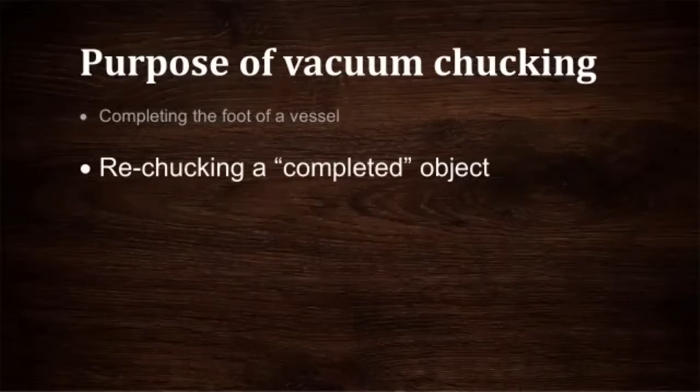The second thing is the possibility of rechucking again. There are some projects I've done where I thought I had it all completed and everything looked really good on the bottom, and I wanted to put it back on the lathe for some reason. So it gives me a way of putting things back on without marring up the surface or doing anything else.

I do sand with my vacuum chuck. Slap a bowl on, sand the outside, flip it around, slap it on the vacuum chuck again, and sand the inside. So it is a sanding fixture, as long as you protected your components, which I'll talk about.

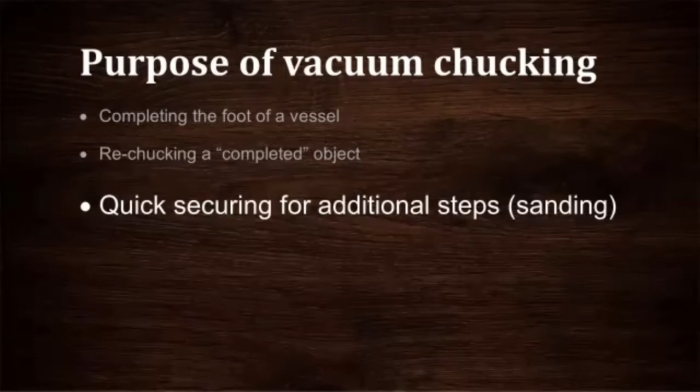There are several components, and basically the way I see it, you just have to have some way to lower the atmospheric pressure inside the vessel - in other words, so the outside atmosphere pushes on it like we want it to.

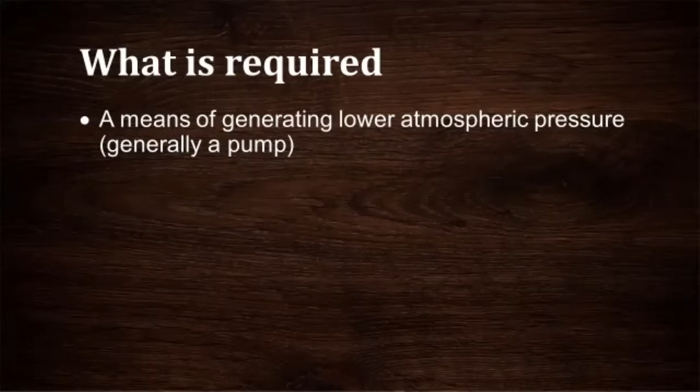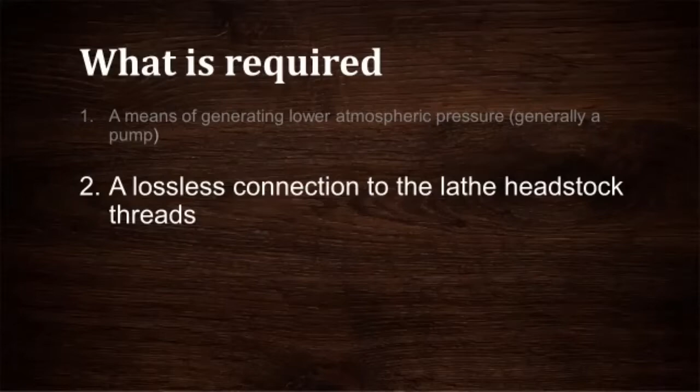I've got to find some way to connect the system through the headstock, so as the lathe rotates, I can continue to suck and have no loss through the connection and continue to suck.

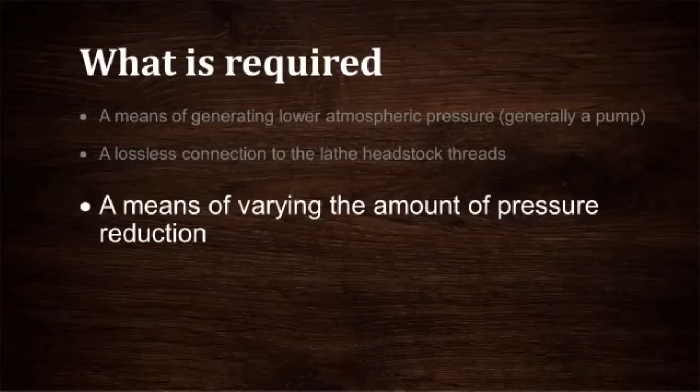I need to find some way to vary it. I could crack it. In fact, one of the things that happens when you're first beginning to work with vacuum chucking and cranking it up too much, you begin to hear things move that you don't want to have move.

And then, of course, you have to have a chuck. There are commercial ones, and then there's handmade ones, and I'll show you how I make them.

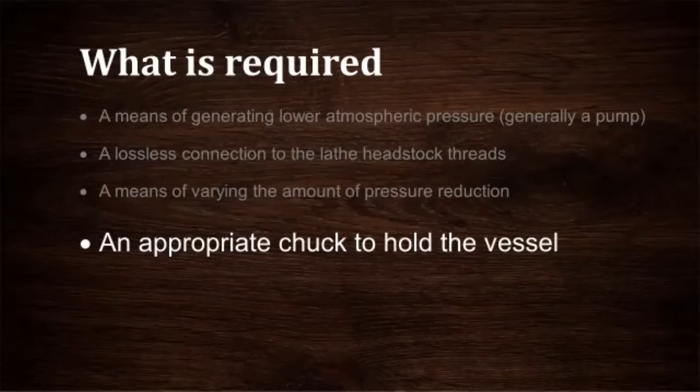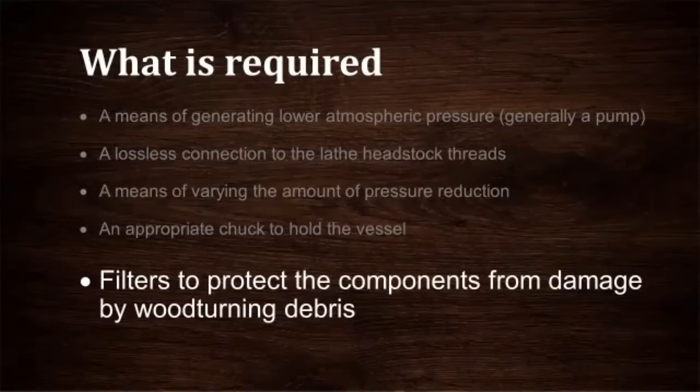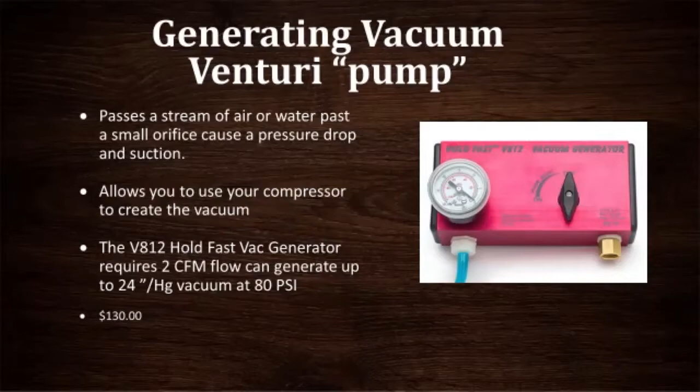One way to generate vacuum - this is one of the early ones that came out, still in the market, from a company called Holdfast. It's not inexpensive, and it requires you to use your compressor. You use the compressor to blow air through a venturi orifice, and that creates a vacuum. This pulls a pretty good vacuum, but it does require a compressor, which runs constantly, and most of ours are not that quiet on top of that, but it's one of the options.

Most commonly used are this kind - this is what we have on the Robust lathe, and it's the same pump we used on the Oneway lathe when we still had it at the club. These are called rotary vane pumps. They're not necessarily very quiet, but they provide high CFM, high cubic feet per minute - in other words, a lot of volume. They also pull a pretty decent amount of vacuum. You turn it off, the vacuum's gone instantly.

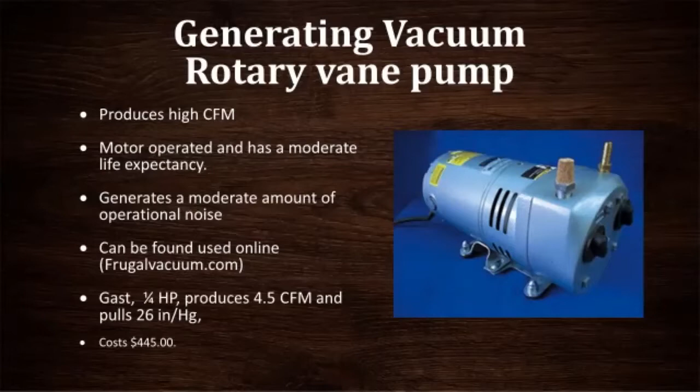These are pretty expensive, but there are places you could buy rebuilt ones. There used to be an electronics surplus store down in South San Jose, and I could always find vacuum pumps down there. These were used in the semiconductor industry, either for test installations or projects. For the bigger depositions in the semiconductor industry, they would not use something like this, but everybody had them for the small test sites, so there were always pumps available. Sorry to say, the source is not there anymore.

We're using one of these at school - this is a diaphragm pump. It's inexpensive and lasts for almost forever. It's totally indestructible, it seems. You fill it with oil, and it uses regular compressor oil. There's a little gauge on the end so you can see if it's got oil in it. They're very quiet, inexpensive, and available at Harbor Freight.

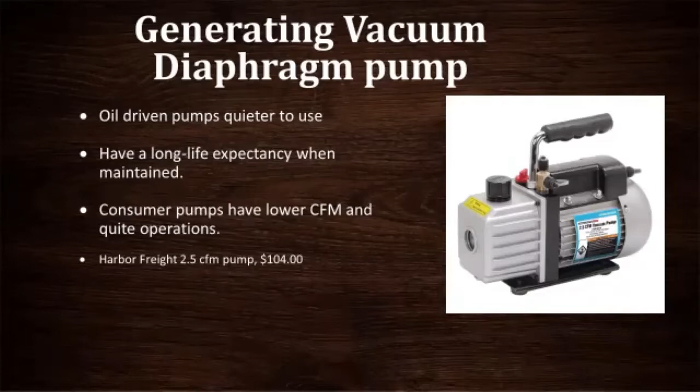This is the one I have at school - it's a 2.5 cubic feet per minute pump. They have a larger one, a 3, and I think it's only like $50 more. Works fine. It doesn't have quite the volume of vacuum that the other ones do, but it works really fine, and it's super quiet and obviously inexpensive. There are other ways.

Rick Nelson did a Sawdust session for us a few months ago, in which he talked about vacuum chucking, and he was using his shop vac. He hooked up the suction, instead of sucking dust into the vac, to the headstock of his lathe. For fairly large projects, it provided enough suction to let him finish his bowls. So it worked out really, really well.

Of course, they are fairly noisy. You could take that compressor we talked about earlier, and instead of having it blow into a tank building pressure, use it backwards to literally suck the air out of your vacuum chuck system. We also talked about refrigeration compressors. They work really, really well, super quiet, and provide excellent vacuum, but the flow rate, the CFM, isn't very high. So if I put a big bowl in there, it may take a few seconds to build up sufficient negative pressure to hold that piece in place.

We used them for a long time. Hal Bain, I mentioned his name earlier, was a club member at one time, and his professional business was refrigeration, specifically ice machines, repair service. He ran a company that repaired commercial ice machines. Ice machines are refrigerators, and they all had pumps. Some of them were pretty big pumps, and that was pretty nice.

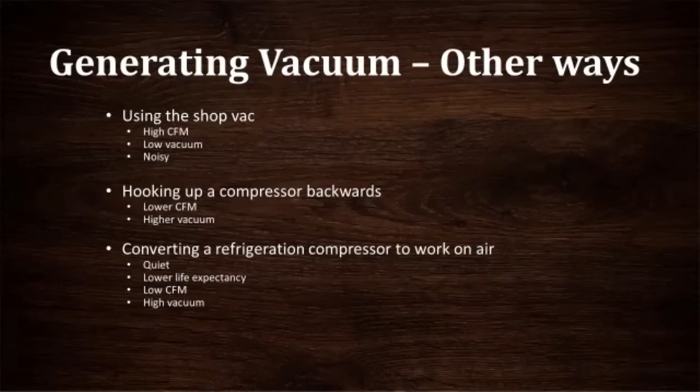Various kinds of adapters - here's the three classes. There's the kind that fits over the hand wheel, like the one in the center, the Oneway adapter, which I'll show you in a minute. There's ones that fit inside the bore of the headstock. The one pictured at the top can be taken out and replaced in a second, so you don't have to leave it in place. The second one, over the hand wheel, generally stays in place until you unscrew it, and then if you need to use a knockout bar, you've got to take these things off.

The third one is the cheapest one, and it's a cheap way of doing things. It actually goes through the bore of the headstock, and the little button in the upper left corner seals at the threads of the headstock at the taper. The rod passes through, and the rotary adapter is on the outside of the hand wheel, so it can be put through the headstock, the little knob screwed on the end, and it's done, it's in place. The advantage of each of these - each has its own individual advantages. The bottom one, if your system has any leaks at all, it seals tightly in spite of the fact there may be leaks in the bore of the headstock.

So, question, Jim, on that. How do you release the spur drives when you have these in permanently? How do I release - how do you get your spur drives out, or if you're using it between centers? That's the problem.

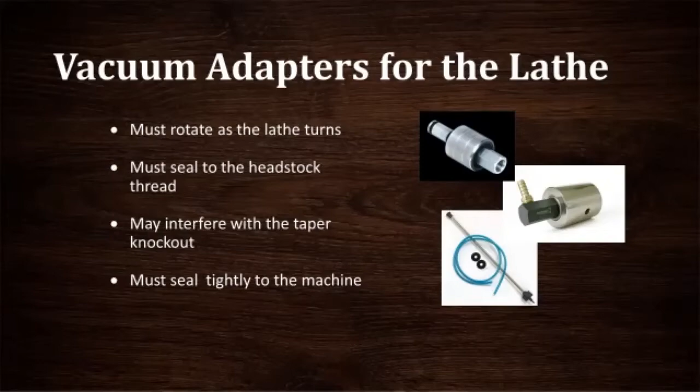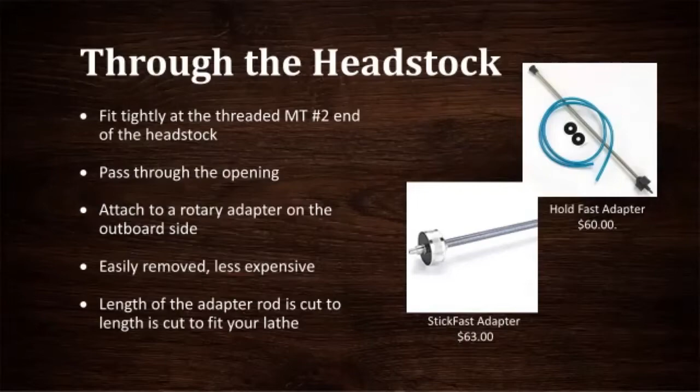And then the rotary part is on the outboard of the hand wheel, so you still have your standard hand wheel to work with. They're not too expensive. On the right-hand side of this picture, you can see the part that seals at the headstock, and the rotary adapter on the left-hand side. They're inexpensive. They work fine. I don't have one.

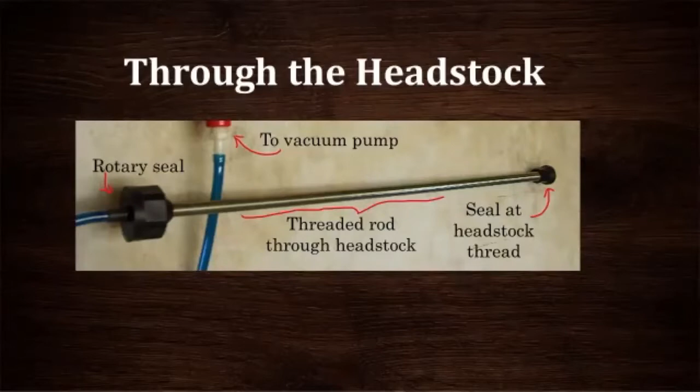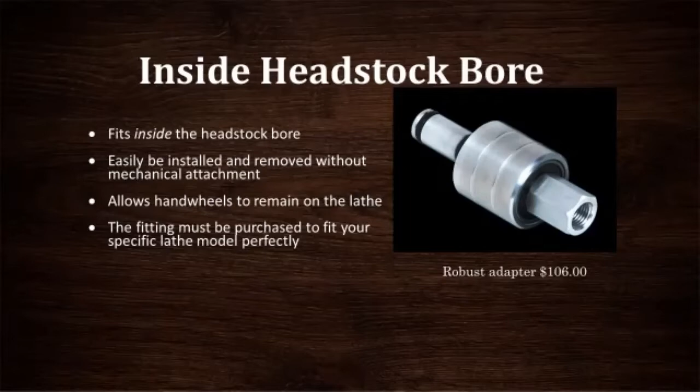I did have one. This is the one that we got with our Robust lathe. On the top left-hand side, you can see two O-rings that fit snugly into the bore of the headstock. And on the lower right-hand side, there is a 1/4 by 8 thread - I think it's 1/4 by 8, I'll have to measure that - that you screw your fittings onto. The one we have at school is all fitted up that way. We just simply jam it into the headstock when we need it and remove it when we don't. I'll take that apart and show you what it looks like in a second.

The third one is something that replaces the hand wheel. This is the Oneway adapter. It's the most massive and biggest. When it's replaced, it becomes almost like the hand wheel. We have those Jet 16 EVS lathes in the classroom, and their hand wheels are about the size and shape of that adapter itself, so I leave mine in place and that is my hand wheel.

We have one for the Powermatic, and the Powermatic has no threads onto the hand wheel. As a result, you've got to have an adapter that fits for the Powermatic, and they have one - they have one for every lathe. So you use an adapter like you would put inside a chuck and fasten it in there, and then it screws onto your hand wheel. Those are the three different kinds.

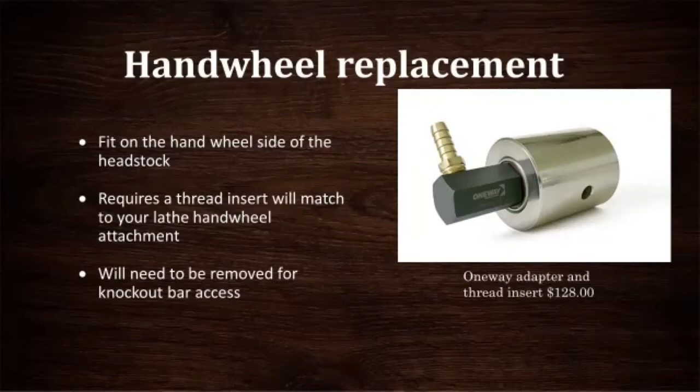Yeah, you can build your own. We have in a couple places built our own. The Jet 16 EVS, for instance, has a very long cylindrical aluminum hand wheel, which is easy to machine. You can machine that out, fit a double sealed bearing in the end of it, and then simply plug your pump into it with an O-ring, which is exactly what we do on one of our lathes at school. It works fine.

You gotta have chucks, and there's a lot of commercial ones. I have 2 of the 3 Oneway chucks at home, the smaller and the middle-sized one. They're really massive, solid aluminum. The edge is radiused, and that looks to be almost 3/8 of an inch thick, and it is. You put an adapter on it so it'll fit anybody's threads.

That's just fine. The phenolic ones, the Hold Fast ones, are phenolic, much lighter, and they're also matched with threads. What I like about the phenolic ones is, first of all, they're light. They have 2 O-rings on them, one sealing the inside edge and one on the outside edge, which allows you to put something over the chuck and seal it that way. Or, given the shape of the piece you're working with, you can actually put it inside the chuck and seal to that O-ring also. So they're pretty nice, and their threads - you can buy them with 1x8, 1 1/4 x8, 33 millimeter, and so on.

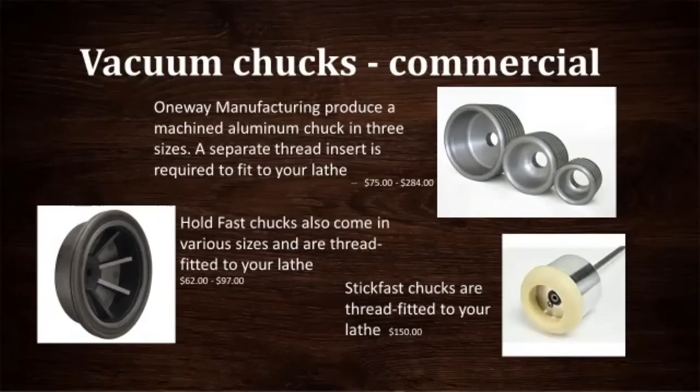So you get options, and the Stickfast is very similar. I don't know anybody who uses the Stickfast chuck, but it is available. As I said before, I build my own, and I kind of enjoy doing it. It's a fun thing to do, but I can adapt it to the specific projects. If I have something very small, I'll make a small chuck. If I have something very long, I'll make a longer one, and so on. I'll show you all the various steps to it, but there are a few caveats.

When I first got into this years ago, I was at the Oneway Manufacturing booth at one of the AAW symposia, and I was thinking about building chucks and so on.

And the lady in the booth says, whatever you do, don't use MDF. I said, why? She says eventually it'll just totally disintegrate. The vacuum will suck the particles right out of the fiberboard, and it will basically blow up. And it's for the same reason you don't want to use plywood. There's too many leaks.

The surfaces of the plywood are porous. So if you made it out of plywood, you'd have to go around and seal all the edges. And you can do that. I've sealed it with all sorts of different materials, but it's so much easier to work with non-porous materials like acrylic.

You know Jim, yeah can you hear me? Yeah, I can. On CNC machines and stuff, what people do is you'll use MDF, like say an 1/8 inch sheet, and they lay that down, and they have their vacuum underneath it, and they can pull a vacuum on sheets right through the MDF. I have never experienced that because I never made a chuck out of MDF, so I avoided the possible problem.

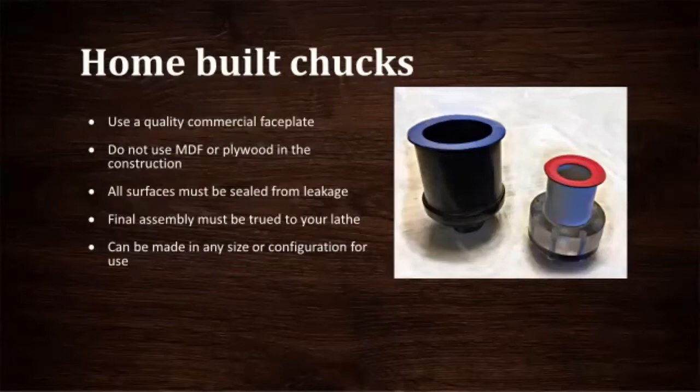Yeah, I don't think I would make one out of it. Well, I've made it out of solid wood, and then I've had to go around and seal every surface because all woods are porous enough that they have some leakage. Unless you have a high CFM, high cubic feet per minute, high volume system, you're going to waste vacuum passing through the porous wood itself. So I avoid that. I have made some that I sealed the whole surface with epoxy, painted it all over all the wood surfaces after I got the chuck done, thus making it totally sealed. That works. Looks bad, but it works.

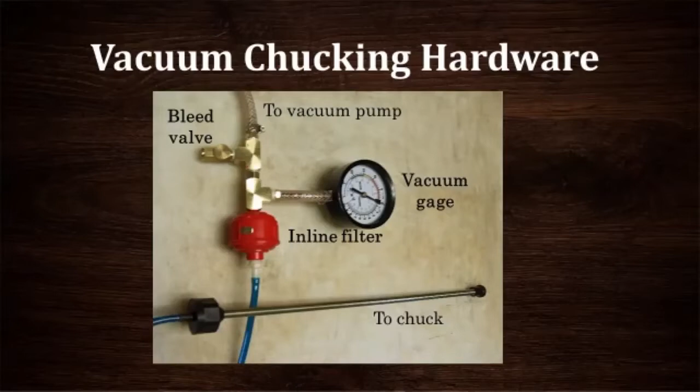I must have paid a total of $10 or $12 for the dozen. So they're really inexpensive. They screw right in. They're 1/4 inch NPT fittings on both ends. So you screw them in, and at some point in time, you unscrew it, throw it away, and put another one in. They're inexpensive, but it's got to be before your gauge and pump in order to keep the dust out of all the fine workings.

Hardware wise, I've chosen to use all brass. Brass is a little softer than the steel, I think they seat better. If you go to your hardware store into your plumbing fittings, you're going to find all the little fittings that you need in all the different shapes and sizes everywhere. They're just all there. I'm using 1/4 inch NPT fittings.

So by that, I mean it's a 1/4 inch diameter. NPT refers to National Pipe Thread. It's a standard. And the reason we're using those is they are slightly tapered. So as you screw the components together, what ends up happening is that they continue to seat more and more snugly, and they're designed for lossless connections. So you can go to the hardware store and say, okay, I need an elbow, I need a Y, I need this, I need a hose barb on one end.

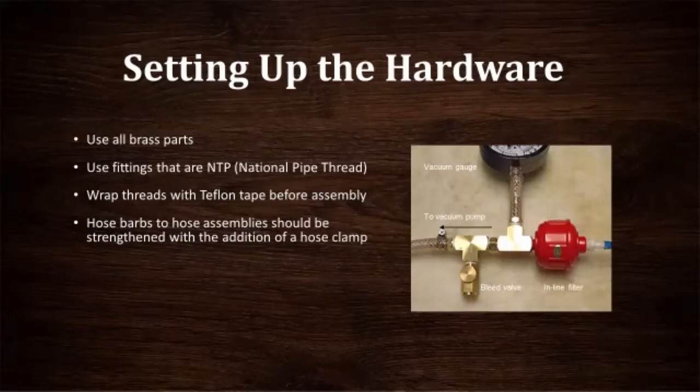You can pick them all up, and I've priced it all out here in a couple of minutes, and I'll show that to you. All those components, I don't mean for you to write this down, but I went to Harbor Freight and picked up all those brass pieces that I needed, the Teflon tape. I went to the hardware store and got 3 feet of the nylon impregnated tubing that I like to use. And I went online to Amazon and ordered that big vacuum gauge. I like that big one. Total cost for all that stuff was just right about $50.

So it wasn't expensive. You are stuck with one other thing. You still have to buy some sort or build some sort of an adapter, and you need that pump. And then of course you have to have a chuck. So from the hardware point of view, not very expensive at all.

Jim, yeah, go for it. Instead of using Teflon tape, Loctite makes a special liquid that you can put on the threads that's far superior than Teflon tape for vacuum. It's designed for vacuum and stuff like that, high pressure, and it seals.

Just, you don't even have to really tighten it that good and stuff, and it bonds. The tighter you get it, the more it sets it. What Michael's talking about is this Teflon tape, which is really inexpensive and super thin. You wrap it around the threads and then screw your components together, and it provides an additional seal. This roll of Teflon tape feels like it's no weight at all because it's so thin. But that's what we're talking about.

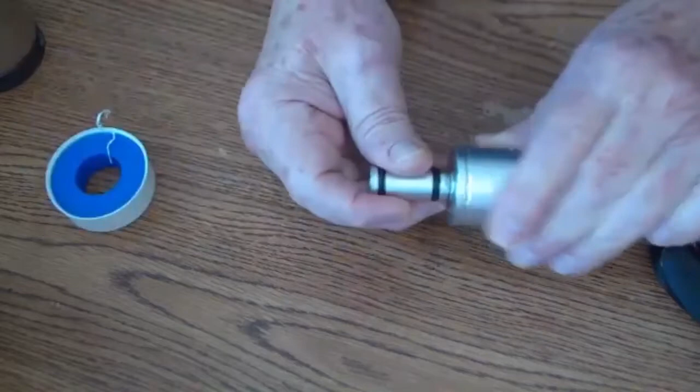And we're talking about the units. This is the adapter from our Robust. This part goes into the spindle, and this part fastens to our hardware.

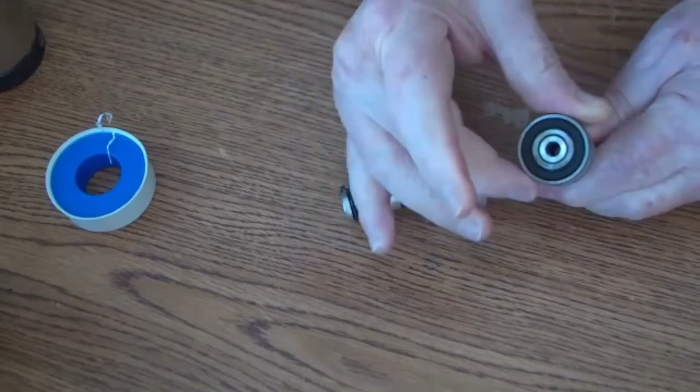And here are two rotary bearings. These are what are called double seal bearings. You can pick them up at any bearing dealer in different sizes, and get different bores, different diameters, if you want to build your own. This is intended to fit snugly into here.

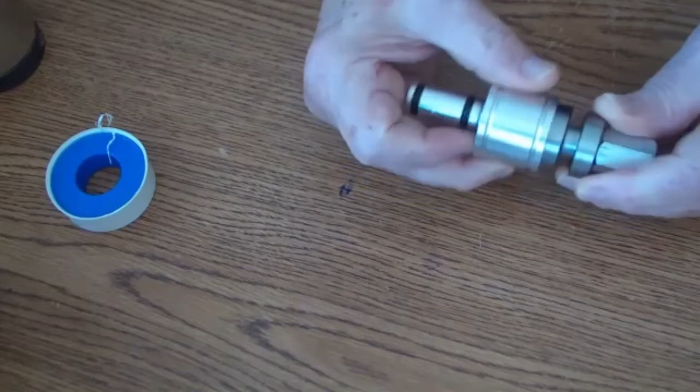If I don't put it back very carefully, I can wedge this thing pretty badly. But it comes apart, and it shouldn't do that. So what I'm going to do is seal these two bearings in here so that when you pull this out of the lathe, you don't end up disassembling it accidentally. I'm surprised it's not completely done. Let's put it that way.

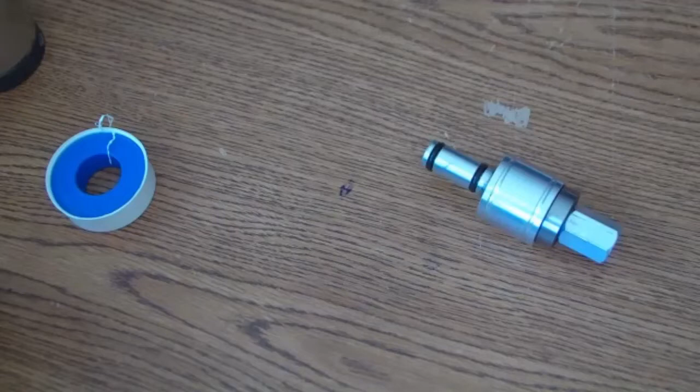Jim, this is Dave. Yeah, Dave. I just checked at Amazon and they carry that little air filter for $3.66 that fits in line for the vacuum pump. Oh, nice. $3.66. That's a good price. That's a good price.

So what I wanted to show you next, if we're ready to go on, I've set up my system, which has a rotary vane pump and a gauge. I've set it up on the Powermatic that we have at school. The reason is that I can plug it all together, and I want to show you the pieces put together. And then what I'm going to do is test it.

And I'm going to test it with a test piece, and I'm going to put a bowl on with two different size chucks, and you can see the amount of difference in the holding pressure that we can actually get. So if you want to go on, now these have been taken out of videos that Dave and I put together earlier. So this is setting up one.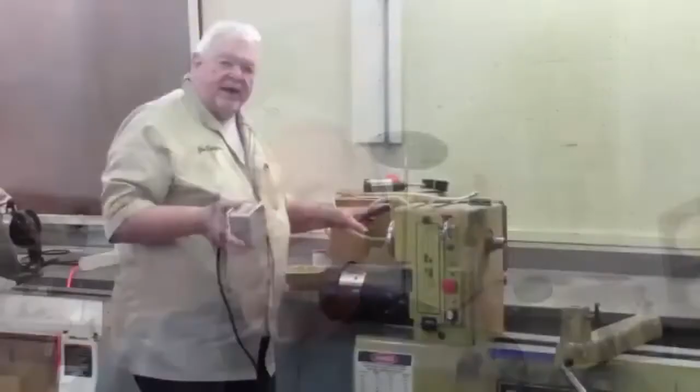Let me show you how that works. I've moved back to the old Powermatic. I set the vacuum pump up on the counter behind. Generally at home it'd be on the floor. This is that power extension I had. Plug the pump into that. Sits on the end of the lathe on a permanent magnet.

So now to install the rest of the system, I have to remove the hand wheel. And that means I loosen these two set screws. Pull this off. On this particular lathe, the shaft is straight, and I've installed an adapter in here that slides onto that.

There is something to be considered. Now, this is an important thing. This shaft has a slot in it for the set screw to sit in. If I screw this adapter on, that slot is going to proceed all the way through the end, and it's a potential leak. So what I have done is in the base of this, I've dropped an O-ring.

So when I slide this on, it's going to seal right to the end of the shaft. Now I'm going to put it in place, slide it on. I know this is a 4mm screw. Tighten it down. And I think there's just the one. Okay, so that's installed. That's done.

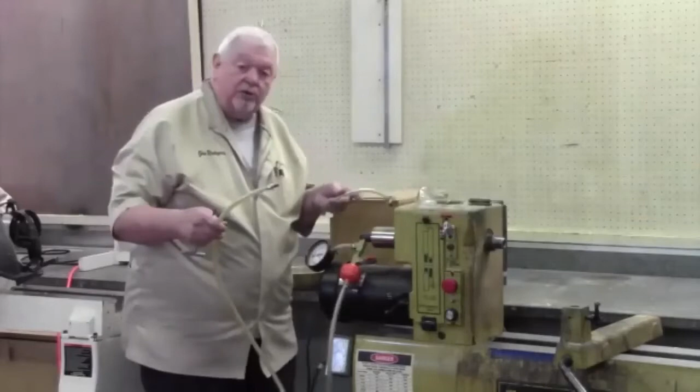Now what I'd like to do is flip this over here so I can see my gauge. I've got my valve open, filters in place. Now for my own personal convenience, I broke this hose into two pieces. It makes it easier for me to transport.

So here's that quarter NPT fitting again. This is the gas fitting, so it fits in here nicely. Screw this together. And to make sure it's nice and tight, take a small crescent wrench. Give it just a little bit of a snug. So the system's together, it's done.

So on the other end is going to be a vacuum chuck. I'm going to step down to the headstock side, and we're going to begin to operate this a little bit and see what a vacuum chuck actually does.

I did cut that hose in half, and I did it intentionally because I rearrange it sometimes, and I've hauled it with me a couple of times. By being able to disconnect everything like that, it gave me a chance to carry the chuck in one hand and the pump and everything in the other hand.

I did want to show you one thing before we go on again. This is the hose, the way I particularly choose to set it up. It's a little bit bigger here. I like this nylon coated hose. It tends to not collapse.

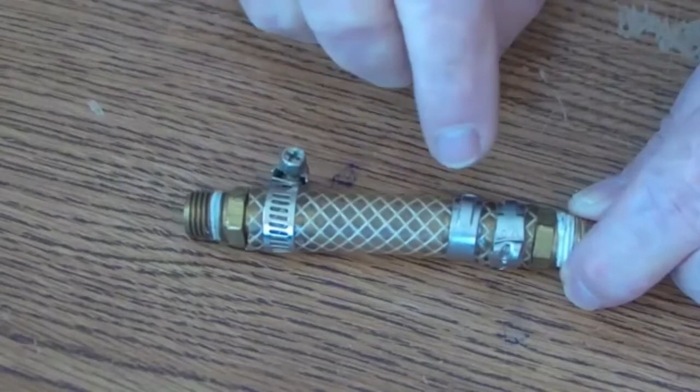My fittings have gone in here. This is a hose barb on this end, goes into the end on both ends. And then I've got clamps, an additional security. I put these clamps around. This is a kind that you just crimp, and the one on this end is a screw. You can get either kind, they'll have them at the hardware store, but my choice is that kind of arrangement.

Just a little bit of what the Teflon tape looks like when I have it in place. Things are backwards here, I've got to be careful where I hold things for you. But that's what it looks like in my system, a short version of that.

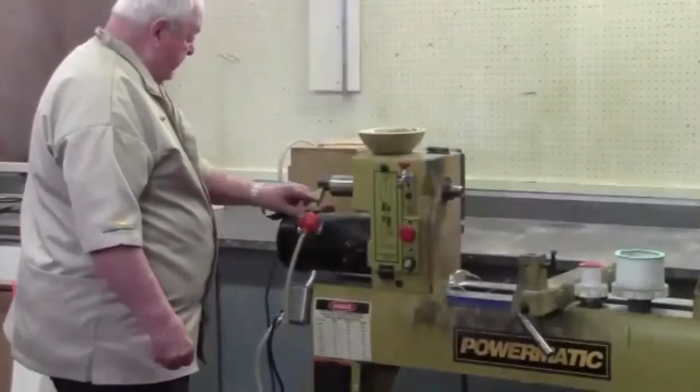So I want to show you the test, how we actually make this thing work. Right now, no vacuum. We close the valve, seal the spindle, and I'm pulling about 23 inches of mercury. So given the atmospheric pressure and the inefficiency of the system, that is my maximum I can get.

And as I open this valve, there's 15, there's 5, and by bleeding this I can adjust the amount of vacuum.

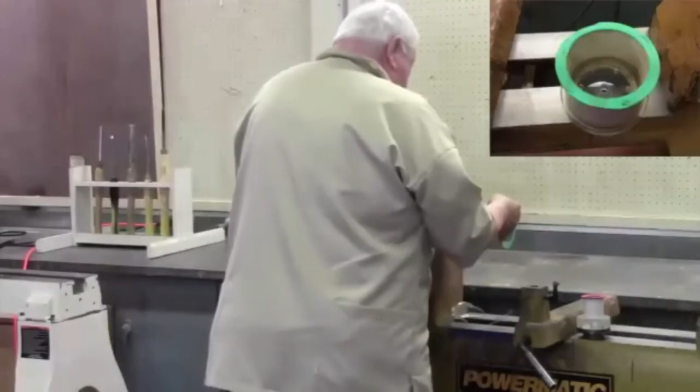So let's put the large chuck on. Seats snugly against the spindle. Hold the bowl on.

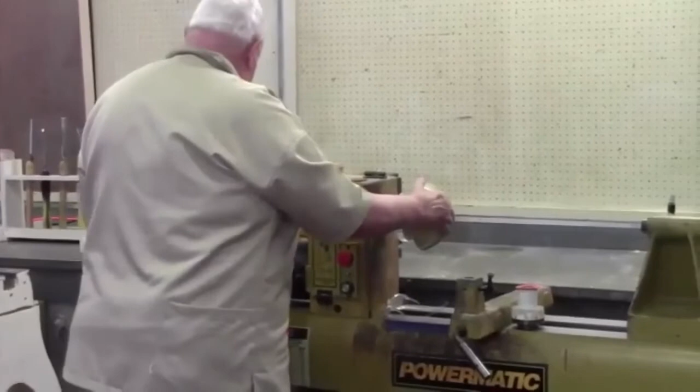Now, given the perfection of the finish on that bowl and the quality of that chuck, I'm pulling approximately 18 inches of mercury. So that's pretty snug. That's not going anywhere. For me to get it off of there, I have to open the valve.

Let's take this one off, put the smaller chuck on. Remember I talked about less square inches, less pressure.

Same system. Now, because I'm holding vacuum in a smaller area, less surface for it to leak, believe it or not, I actually have 21 inches of mercury, but I only have it over a small area like this, so the total amount of pressure in that bowl is far less.

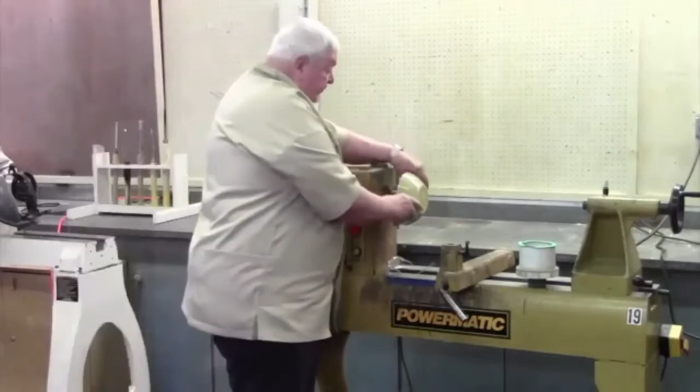Can I get this off? With a little bit of force, I could pull it right off because there is less atmospheric pressure pushing it on. That's how the system works.

So square inches of surface, we're talking about at sea level under standard temperature and pressure conditions, which never happens, 14 pounds of pressure per square inch of surface.

So the key is it's the area of the surface that's being touched times the pressure per square inch. In other words, how many square inches times 14 gives you the answer to that.

So here's some options, these are 3 I've made. These 2 chucks are going to hold the same vessel differently. The smaller one, I'm going to be able to jerk it off easier. The larger it becomes, the more help it has in holding on.

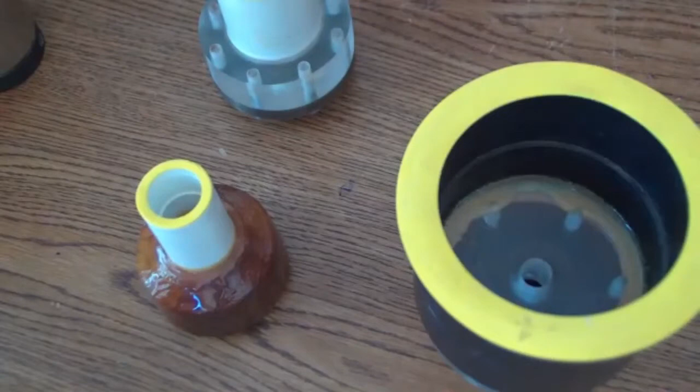So, even things like that are vacuum chuck. We've got lots of different options, and the ones I've made come in all sorts of different sizes, but they have a lot of common features. Here is the one I told you that I made out of wood.

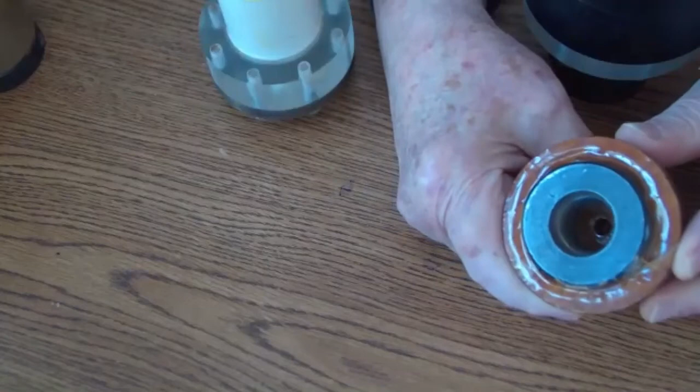I used what's called a fender nut. This is a 1x8 thread, and this is known to be dead flat. These are used in bridge construction. And so I buried that fender nut in a piece of wood, species unknown.

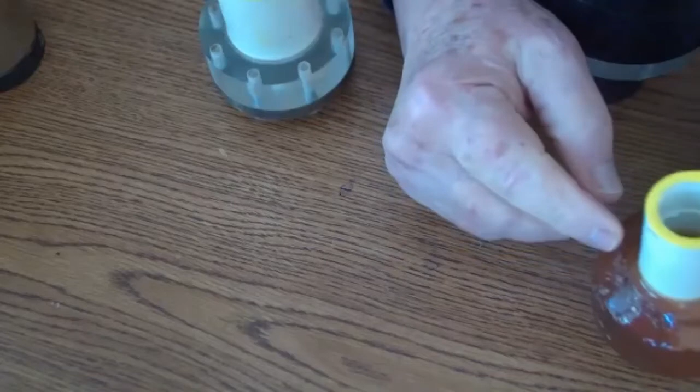And then I buried my tube, my chuck material, into that. And then I epoxied this whole surface everywhere. Be sure there's no place that the air can leak through the fibers of the wood. And then I went ahead and built the chuck up.

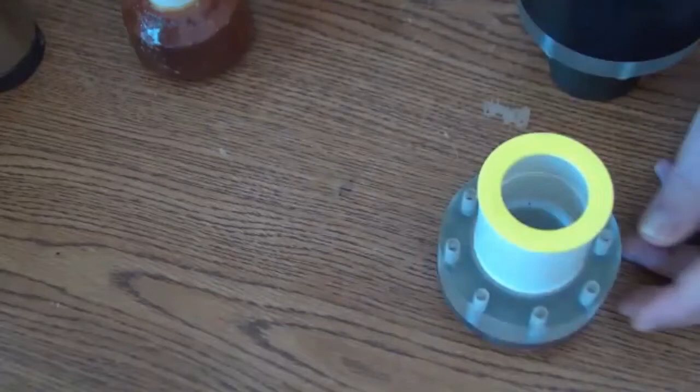Most of the times I have used acrylic material. It's been my favorite way of doing things, for several reasons. First of all, this is not going to leak. It's not porous. It's not going to leak at all.

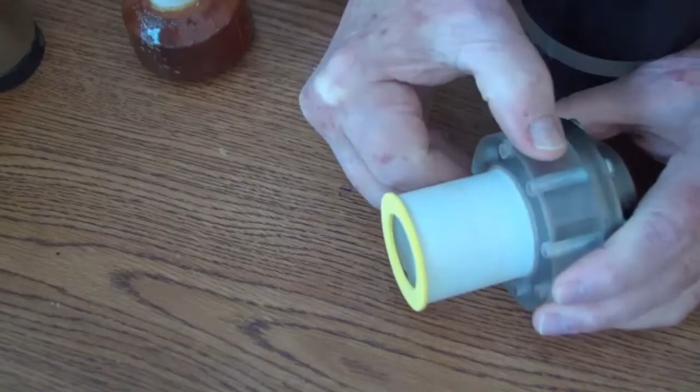Second thing is I can cut threads in here and screw the faceplate on with a threaded screw, and each of these holes are going to seal very well. In this particular case, the chuck is inside of those threads, so there's no possibility of a leakage.

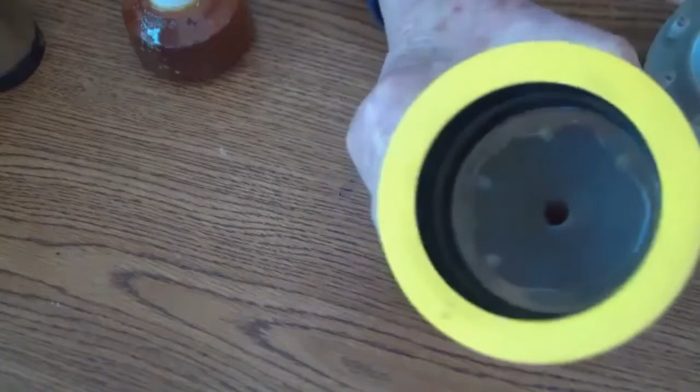But in this one, the threads are inside, the screws are inside, but they've been sealed. So I like working with acrylic.

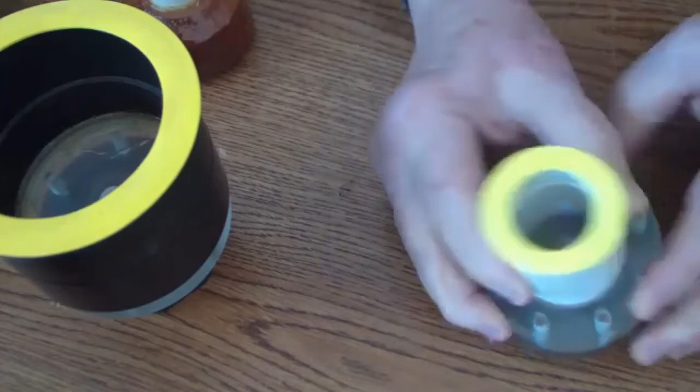I screw this on, face it flat, screw it in place, dig a groove, bury my chuck body in there, square it off at the top edge on the lathe. Make sure this is running true to the face of the lathe, and then add a seal material on the top of it.

Seal material comes sort of like this. It's very thin, closed cell foam. I get this at Michael's. I think Hobby Lobby also carries it.

When they sell it, they recommend a particular type of glue. It's a little white glue, a little tiny bottle, about that big. I think it's the same thing as standard Elmer's white glue. But I haven't chosen to use this. I've always stuck with theirs simply because it works.

Maybe one of these days I will try an experiment where I'll actually use other white glue, put a bead around here, put this on it, and see how well that seals up. But that's the process.

Question for you, Jim. Go, please. Is there a vacuum loss through the threads? And do you do anything to seal that area at all?

In this case, there is no vacuum loss through the threads because this hole is outside of the chuck. I'm talking about the headstock, that one there, yes. Oh, yes. That's a great question because it has been a problem on certain lathes. If the bore of the headstock is a solid piece of metal going from the threaded end where we screw our chucks on to where we attach the vacuum attachment on the other end, then we're in good shape.

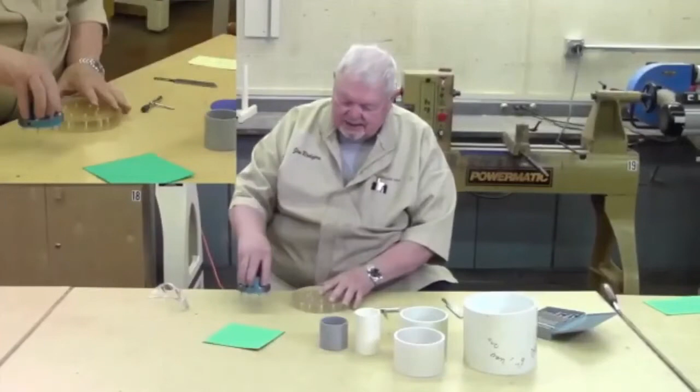First of all, I'm going to use a commercial faceplate. I'm going to find a piece of acrylic of the right size. I roughly turned this, then drilled and tapped these holes - this happens to be 8-32 thread. When I screw this onto these tapped holes, I'm going to have a very tight, vacuum tight seal at each of those holes. But I screw it onto the side that still has the paper, because the paper acts like a small seal. So I'm going to screw this on here.

I've already marked for the diameter chuck I want, so I know where the outside of this is going to be. For the material for the chuck, I've got to choose some type of pipe. This is all called Schedule 40.

So I need my faceplate and screws. I have drilled and tapped, and I'm going to fasten this down here. Then we're going to go to the lathe and put the vacuum hole here and dig a groove. I'll probably take the short one here that this will sit down in. See you in a minute.

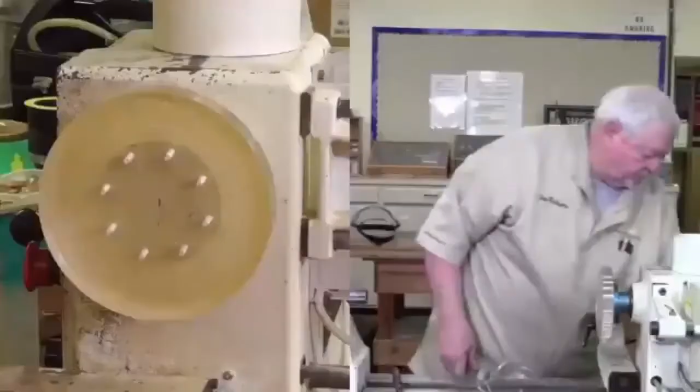Back at the lathe, and we have several things to do. First of all, when I drilled and tapped these holes, I drilled them all the way through the plastic for two reasons. Number one, I'm using what's called a plug tap, which pushes the swarf out ahead, and I give it a place to go. Drilling into acrylic gets hot, even when you're hand drilling or hand tapping. What happens is you have to stop and clear a lot. So I drilled all the way through, simply to make it easier.

This is never going to work without a hole in it, so I'm going to put a hole in the center. I went back to the cabinet and selected one of our Morse taper drill bits at random. I'm going to put the hole in, right? So might as well do that right now.

Don't want to drill too fast. All the way through. So now it's the vacuum chuck that's going to work. I'm going to take my drill bit out.

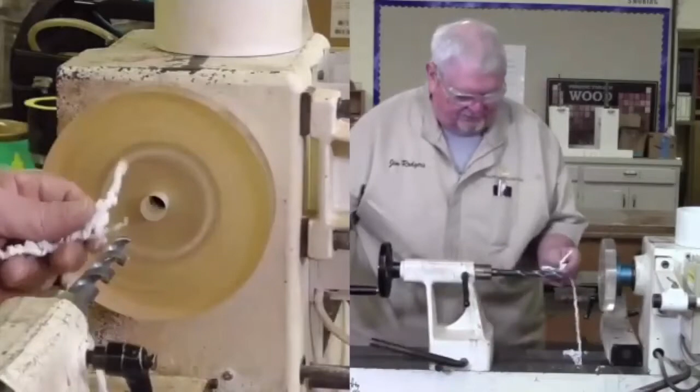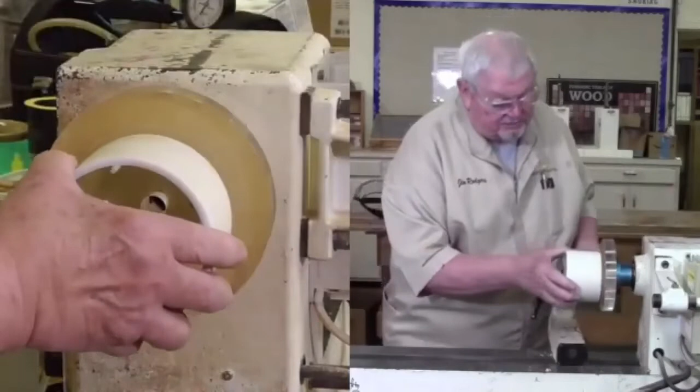Now my next activity is to come up here and dig a groove that this will drop down into. I laid this out ahead of time to mark the outside, and I need to find a tool that will cut a nice shallow groove. I measured the wall thickness on this and picked up one of my parting tools. I find my parting tool is about three quarters of this distance, so I'm going to be able to cut in here, move over very slightly, and complete the groove.

I'm going to go slightly inside my mark just in case. Before I go too far, let's see if I'm on the mark. It's going to be okay. So it's going to take me a little while to dig that groove in here. I'm going to come down about half of this distance, and I'll be back in a couple minutes when I've finished cutting the groove.

Okay, I've got my groove. What I'm going to do then is cement this into place, and then I want to retrue this edge to this whole system. This has to be exactly true to this lathe and this system. So I'm going to take this off, put a little bit of epoxy in here, put this in place, allow it to dry, and then we'll be back in a minute. I'm going to go off camera for a second, glue this, and we'll be right back to this place.

What I could have done is, when I was gluing in the piece of Schedule 40 pipe with the epoxy, I could easily put a drop of epoxy on top of each of those screws. That would have provided an additional seal. But I have found mostly the thread into acrylic has been a very snug fit, and it's worked out really, really well for me. So I thought I'd stop before we put that foam on. I did want to show you one other thing, which I thought was kind of something we want to talk about a little bit again. We talked about these filters, these little inline filters that come cheap in pairs.

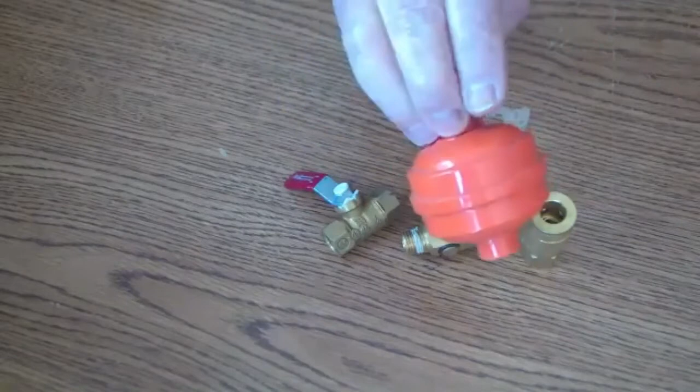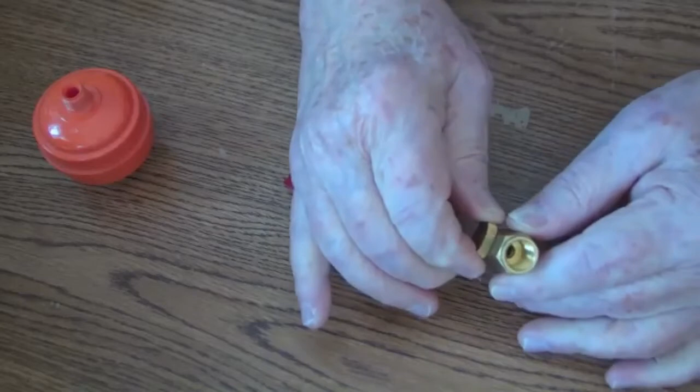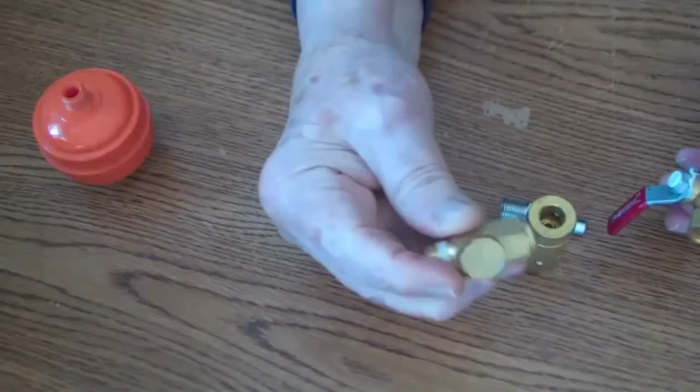In my setup originally, I used this as my bleed valve. It's a little rotary valve, and I thought it was really cute. I found that it wasn't very successful. This is what we call a ball valve, and it wasn't very successful because it leaked. The ones that worked much better were these lever kind. When it's closed and when it's open, it's pretty easy to know what position you're in. So I prefer these lever ball valves rather than this less expensive one I got at Harbor Freight, which wasn't successful for me.

The other thing in hooking things up I want to avoid, I didn't mention this in the videos, is these quick disconnects that we use in our compressor connections. Don't do that. This is good enough for that, but it's not a snug tight fit. The other thing to avoid is mixing materials. I like all brass, it's been my preference. I don't use any of the steel fittings. So, ball valve versus less expensive ball valve, get a good one. It's going to cost you maybe a dollar extra. And don't use any of these quick disconnects. They will all leak to some extent.

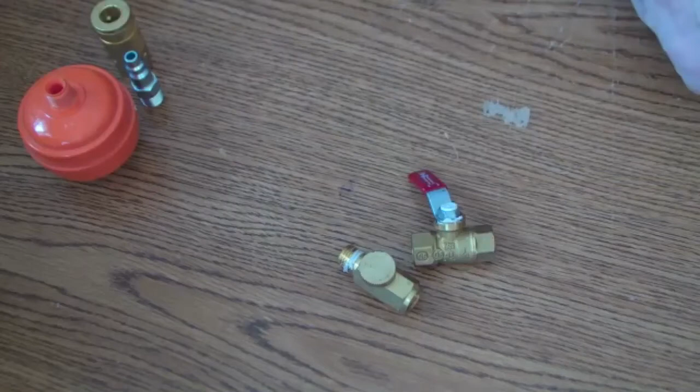Question on your air filter, Jim. Is that specifically for vacuum, or is that one that's also used with compressors? And if so, do you run it backwards for a vacuum?

Exactly, it can be run either way. These come with quarter NPT fittings, male and female, and there is a direction of flow marked on this body someplace. I don't see it right at the moment, but it is marked on there. Maybe it's printed here. So for vacuum, I want to be sure it's going this way. For pressure, I want it to go the other direction.

When I take them off, I can shake them and pop stuff out of there, but I change these things from time to time. I change mine about once a year, and I use it a lot for sanding, so there's a lot of dust accumulation in this thing. It's not that it's getting through into my hardware, but it's cutting down the efficiency of the system. It's like an air filter where you don't clean the filters - it filters even better, but it's not filtering near as much air. So it's important to remember to throw them away from time to time. And they're so inexpensive. This one, because it screws on, I've got to screw it into place.

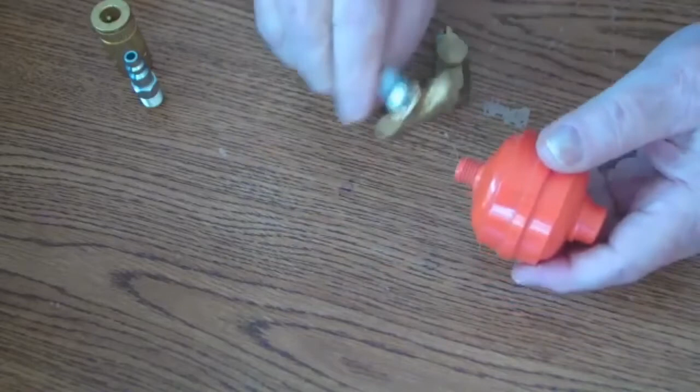And being a quarter NPT, it screws snugly. And then the other side...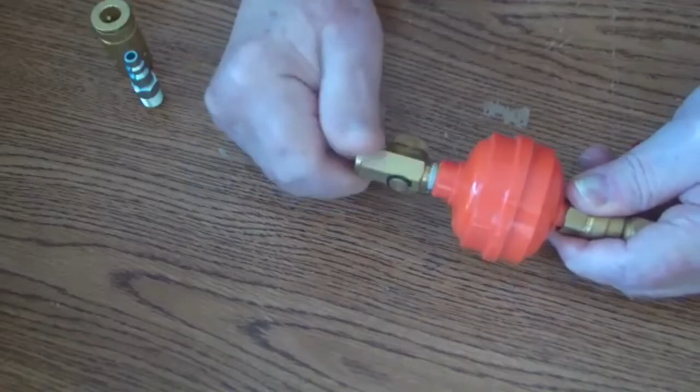Same thing. So a follow-up question: I have read that on diaphragm vacuums, it's important to have a moisture filter also. Does this act as that, or do you run another filter to take out any moisture? No, because the pump is after the system.

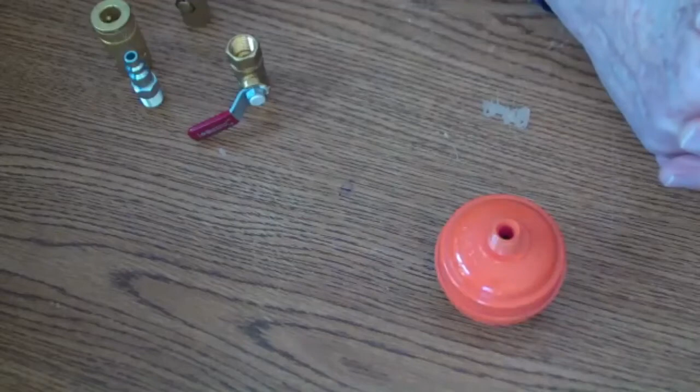How to say this thing - the diaphragm pumps may produce a small vapor of oil, which we have seen in the past off of ours. It's just a very light misting. At Las Lomas High School, where we set up a system like that, they actually put the pump in a box with a lot of open sides so that oil mist doesn't end up on the floor, and it needs to be replenished. But remember, we're sucking into the pump, not blowing out from the other side, so any mist is going downstream away from our... let me rephrase.

My understanding was moisture gets sucked into the pump from the wood and can cause damage to the diaphragm. Moisture could get sucked in through this, and I suppose you could put a moisture filter in place if you wanted to. I've never seen the need for it. I'm also not going to be vacuum chucking a piece of green wood that has high moisture content. I'm chucking at the very end of the making process, which means the thing's been dried and finished. At that point in time, the worst thing that's going to come through is maybe a little bit of sawdust, but I've never had a problem with that. And it's an oil bath, so I figured that that's protecting the diaphragm also.

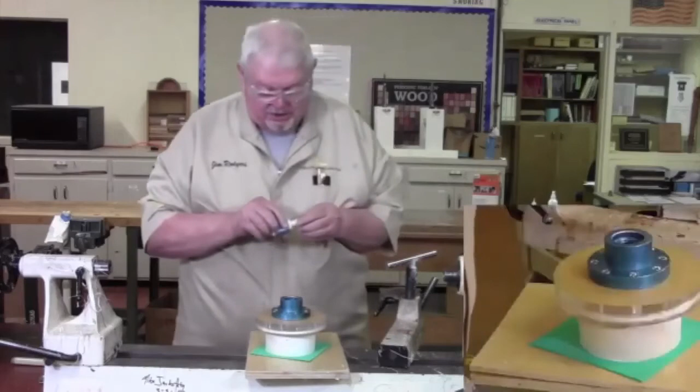Done. Now that's going to sit there. I like mine to sit at least overnight, if not a full 24 hours. I don't know how long it takes for this glue to actually cure, so I'm not taking any risks. So this is going to sit here, and I'm going to go put this away and bring out another chuck that looks just like this, that has sat for a full 24 hours, to show you the final step.

So this gets lifted away. And here's what it looks like after it's sat there for 24 hours. Got a piece glued on. I'm going to mount it back on the lathe again.

And I now need to trim, and the easiest way to do that is with our trusty skew chisel. I sometimes come in with scissors and trim this down, but that part's trimmed. Now I want to trim on the inside, just with the edge of the skew chisel.

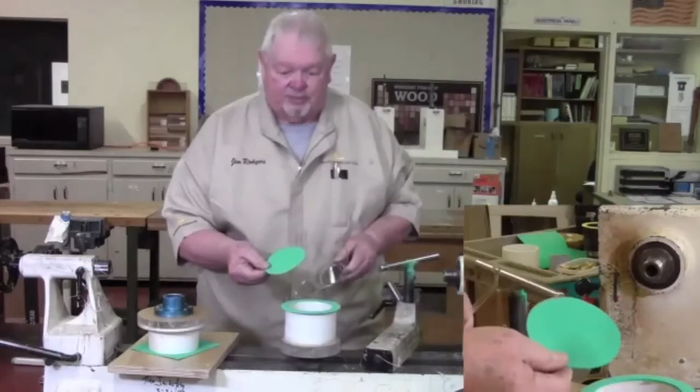And here's a piece I can end up using on another project, a smaller chuck. So it's done.

We screwed it to a faceplate, squared this up to the faceplate, dug a groove in it, glued on our plastic pipe, and glued on the seal. Now sometimes over wear, these seals will eventually break down. Fine, I always have plenty of this. I retrue the edge, put a little touch of glue on it again, and put another piece on. So there's your vacuum chuck. Any size, any shape you want, you can make.

It's as simple as it was. So, comments, questions, issues that you're having with your vacuum systems that I might be able to put out here for discussion.

Jim, the question about Schedule 40 PVC: it's important that it's Schedule 40, but the larger the pipe, the weaker the pipe seems to be. Does it really matter, when you get down to smaller sizes, to use Schedule 40, or is that necessary? No, it's not.

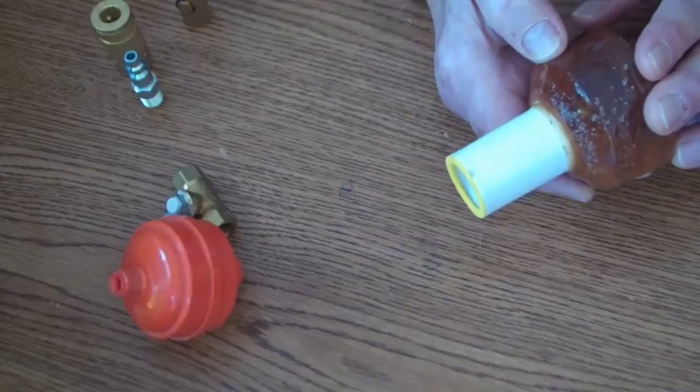And some of the smaller things I was using here were irrigation pipe. So when you're installing an irrigation system in the yard for drip lines and so on, some of that pipe works equally well.

Schedule 40 is a definition of—how do I say this—it's a relationship of diameter to the ability to tolerate a certain amount of pressure. So as the diameter becomes larger, the wall actually gets thicker. The point is that it's designed to maintain integrity up to so many pounds per square inch before blowing up. So a little small piece of Schedule 40 may have a wall thickness of 1/8 inch. A bigger piece may have a 3/16 wall. So don't count on it being a constant wall thickness depending on the diameter.

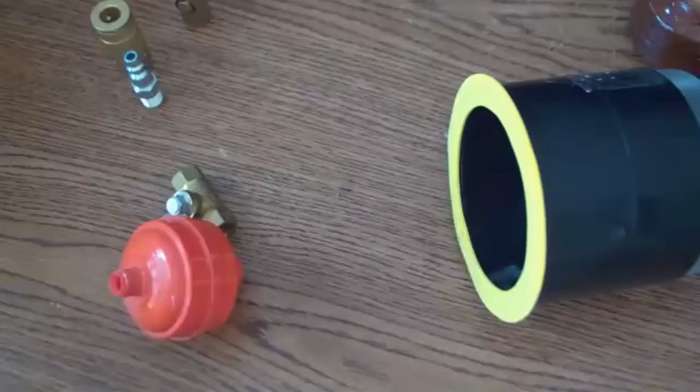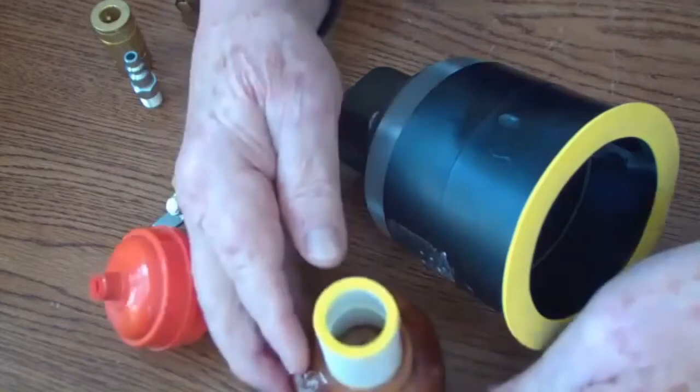The other thing I've done is—there we go—sewer pipe. So we can go to all sorts of different places and get pipe. But I like plastics, and I'm in the plumbing department when I pick up my stuff, so I can use things from the garden department where I might be taking a piece of material for that, or I can actually use any size that's needed.

I have a chuck out in the garage that starts with one diameter and comes down to a smaller diameter, so it's very rigid. It's very deep, and it's designed for things that have a large over-projection. So sometimes it's easy, sometimes it's just fun to make another chuck.

Yeah, question, Jim, comments? Well, I had a question—I put it in the chat too—and it seemed kind of strange because I was looking at putting one on my Nova, and listening today, there doesn't seem to be any reason why I shouldn't be able to do it. But I did contact Nova, I said, hey, do you have a recommended one? And they said, we recommend not using a vacuum chuck at all. Do you have any reason why they would say that, or is it just somebody on the other end typing an answer in, trying to get me to go away?

I can't think of a single reason. The key is, if that bore through the headstock is a solid integral piece, there's no reason you can't attach a vacuum chuck to it. Now, it's not like the normal lathes where we have a bore going through with a pulley going to a motor. It's the shaft of the motor. But if there's no holes in it and it's steel or cast iron, I can see no reason at all for not doing that.

Commercial faceplates are nice and flat on most of them. I've not had a seal problem, but I can very easily see that that could be an issue. If this has been scarred, if the headstock has damage to that face surface, that nylon washer is a great idea, Mike — I think that works really fine. As it seats down, that's good. I've just never had a problem with that. Mine have seated very well.

I have one chuck I made out of a non-commercial faceplate — I don't know where it is here, I didn't bring it in. Bill Tarleton, a friend of mine who passed away a few years ago, used to make faceplates, and Bill's faceplates were made out of nuts and washers, and that back surface was never flat. So I had two choices: either find a way to square that to the axis and make it dead flat, or put that washer in that you're talking about, Mike. That's exactly the right thing to do. I was able to, because I have a metal lathe, chuck up his faceplates and retrue that back edge of that nut. It's not available to most people though.

The other thing I just wanted to point out — Robert Sorby sells a replacement. I haven't used it yet, I just got it in a couple days ago, but we'll see. Replacement for what?